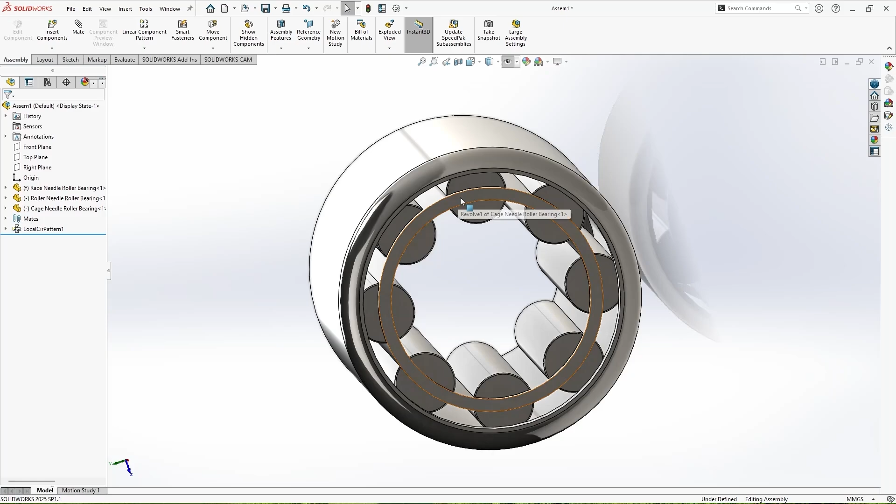Starting from the inner race, then the roller, the cage, and finally the full assembly.

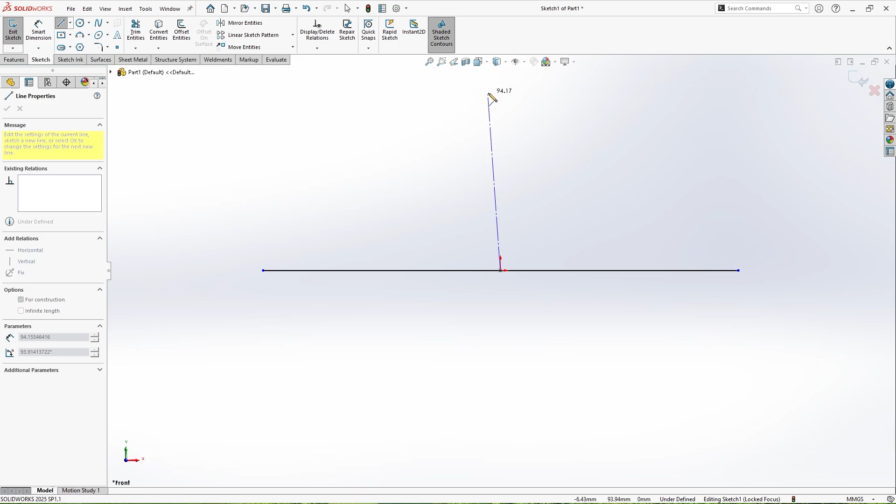To begin with, create a new part and open a sketch on the front plane. Next, draw a horizontal midpoint line, making sure it's centered at the origin. After that, add a vertical center line starting from the origin. This will act as the axis for the revolve feature later.

Now turn the horizontal line into construction geometry, so it doesn't interfere with the main shape. Then draw a rectangle; this will form the base profile of the inner race. Inside the rectangle, draw a vertical line and a small circle near the top. This helps define the internal shape.

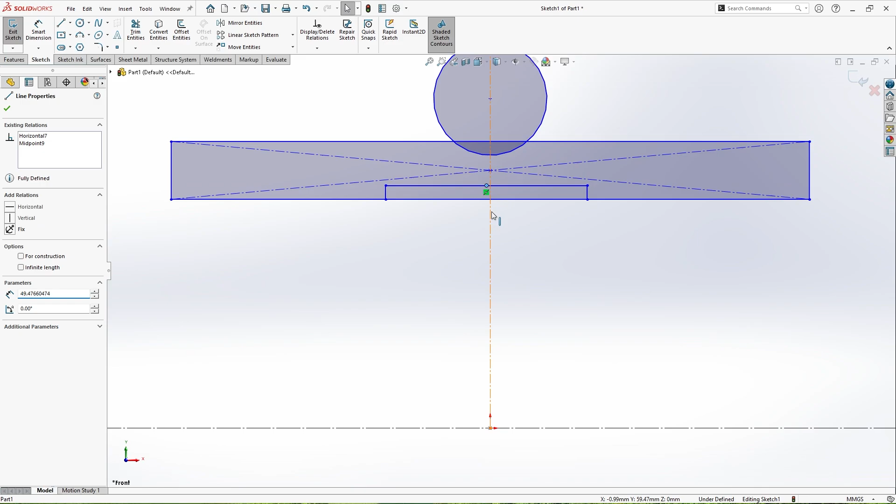Next, use trim entities to remove extra lines and clean up your sketch. Then apply Smart Dimension to lock the size and ensure everything is fully defined.

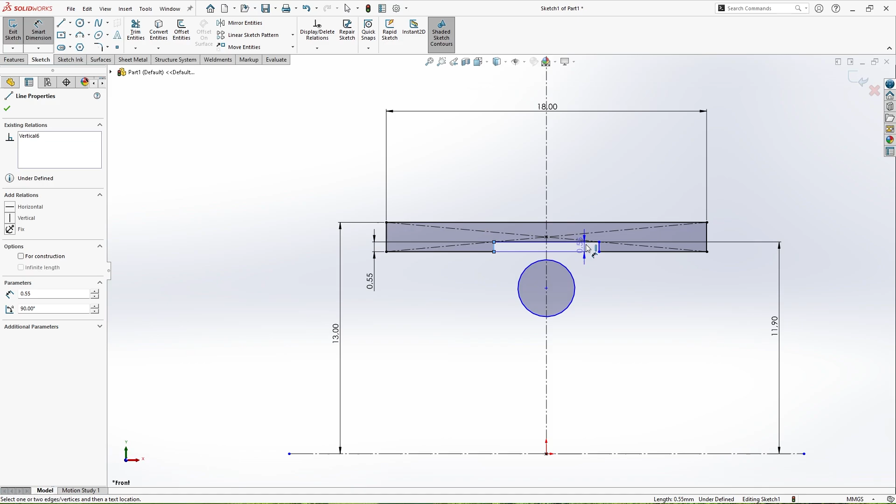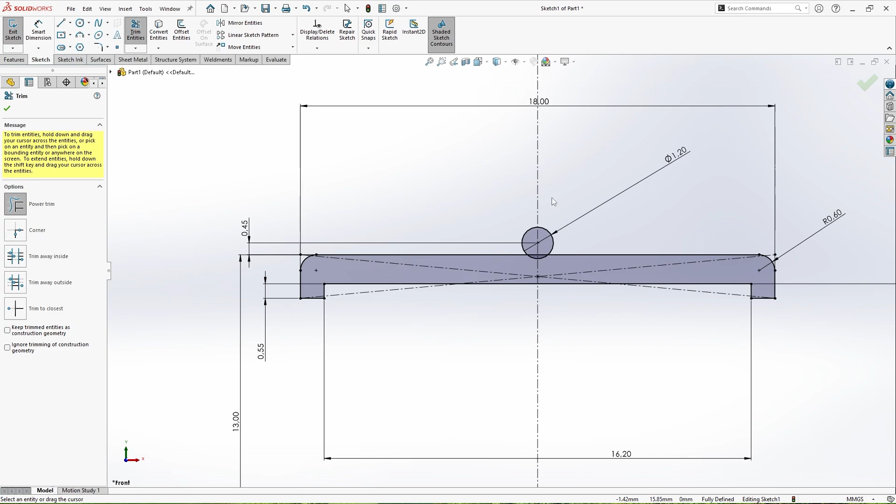After that, add a fillet to the top corners to smooth out the shape. Once that's done, trim any leftover edges you don't need.

Now revolve the profile using the revolved boss/base to turn it into 3D. Finally, save the part as the inner race needle roller.

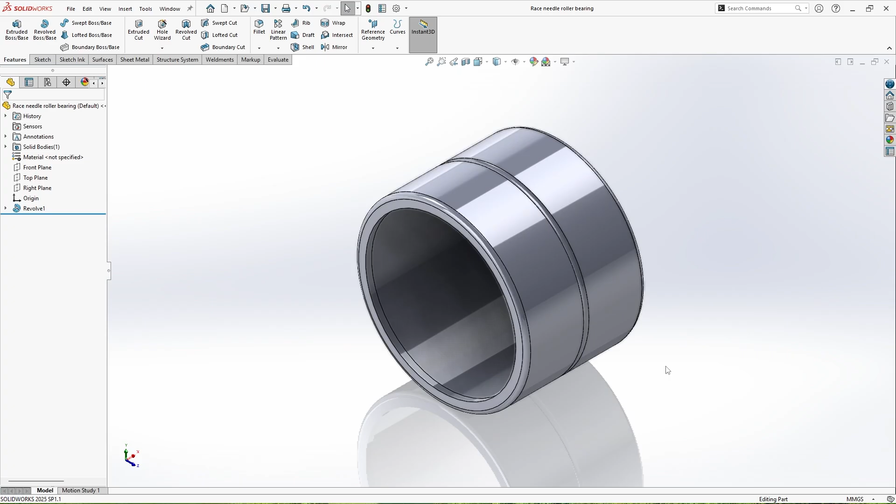Next, the roller. Create a new part and start a sketch on the front plane. Then draw a rectangle and make sure it's center aligned with the origin. This keeps the part balanced when it's revolved. After that, use Smart Dimension to set the height and the width.

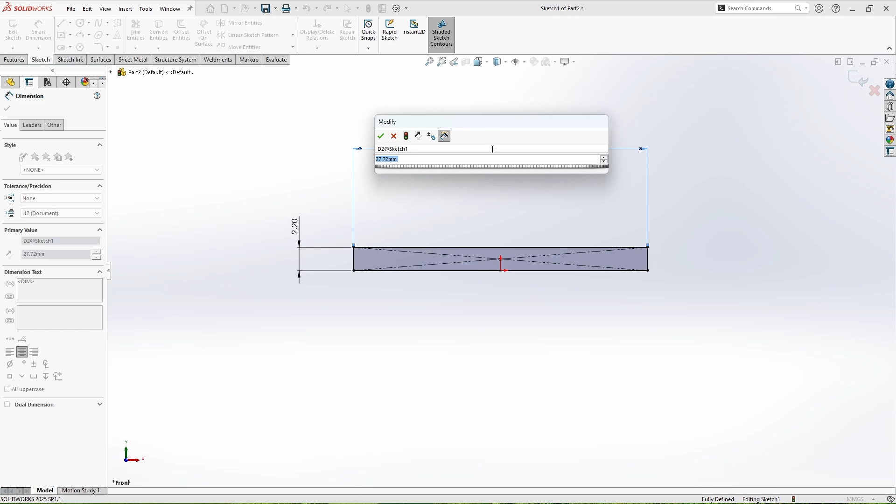Now add a fillet to the top two corners; this helps reduce friction in real-world use. Use the Revolve feature to create the 3D roller. Finally, save it as the roller needle roller bearing.

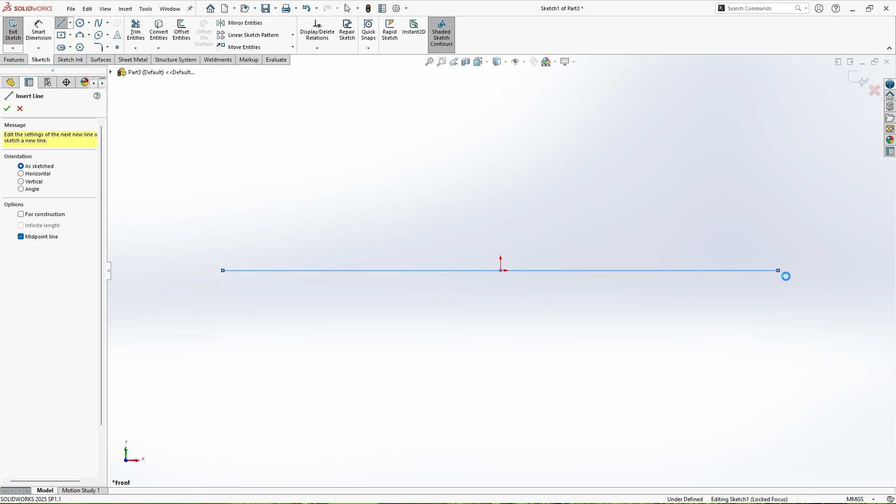Next is the cage. Now start a new part and open a sketch on the front plane. Begin by drawing a horizontal midpoint line and a vertical center line from the origin. Then turn the horizontal line into construction geometry.

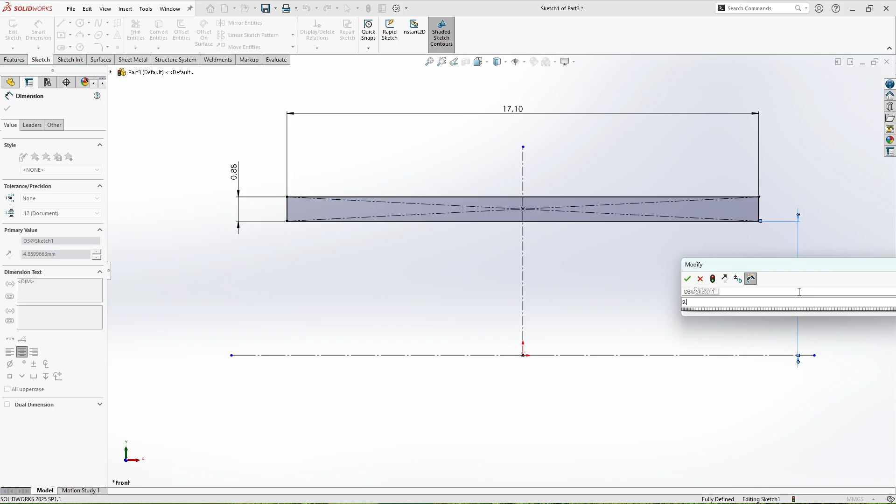After that, draw a rectangle to define the outer shape of the cage. Next, use Smart Dimension to size the sketch precisely. Now use the Revolve feature to give it thickness and make it 3D.

Then switch to the right plane and open a new sketch. Draw a circle centered at the origin and convert it into construction geometry.

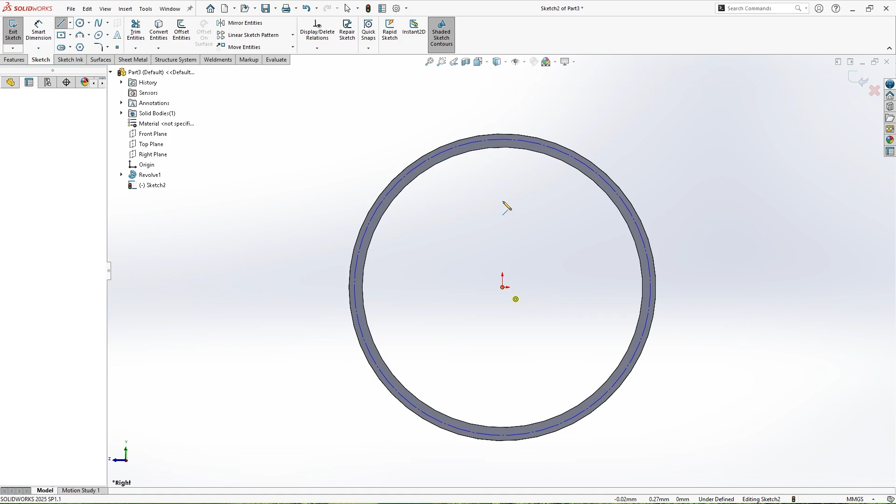Now draw 3 connected center lines from the origin to guide the hole placement. Then set 2 angled lines to have equal length using the equal relation. Next, draw a circle at the top end of the center line; this will be the hole cut.

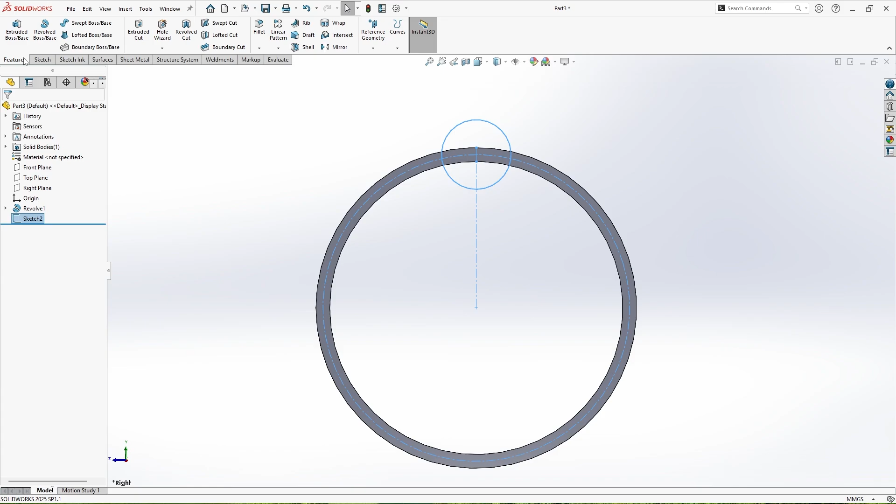Use Smart Dimension to set the diameter of the circle. After that, use Extrude Cut to remove the material and create the hole.

Click Show Item to reveal the center axis. Now use circular pattern to duplicate the hole around the cage, with a total of 10.

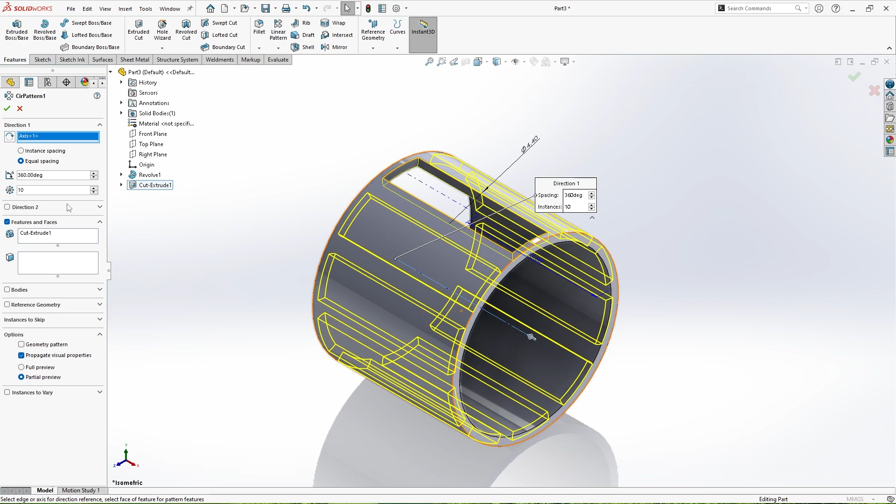Finally, save the part as the cage needle roller. Next, the assembly. Create a new assembly, then insert all 3 parts: the inner race, roller, and cage.

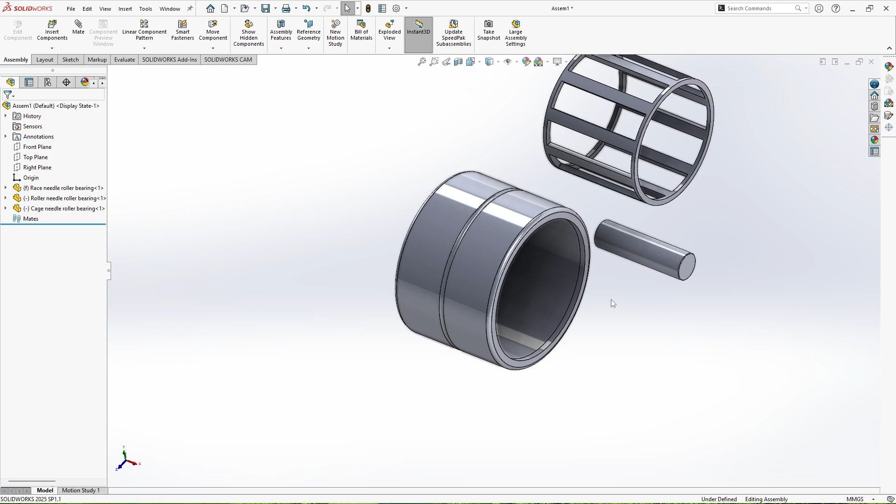Start by using Mate with the concentric option to align the cage and the inner race. Then use Mate to keep both parts centered face to face. Now use tangent mate to place the roller so it touches the race.

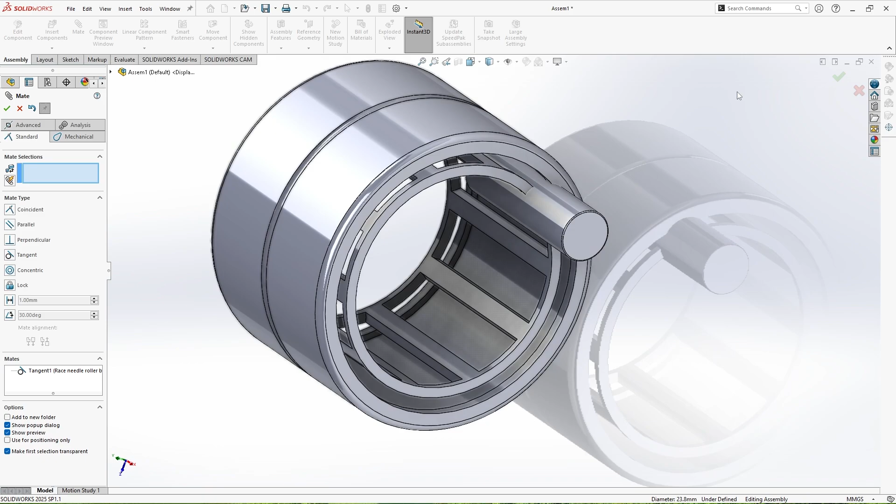Hide the inner race for now, so it's easier to place the rollers. Then use coincident mate between the front plane of the cage and the roller. Next, apply a width mate to center the roller inside the cage.

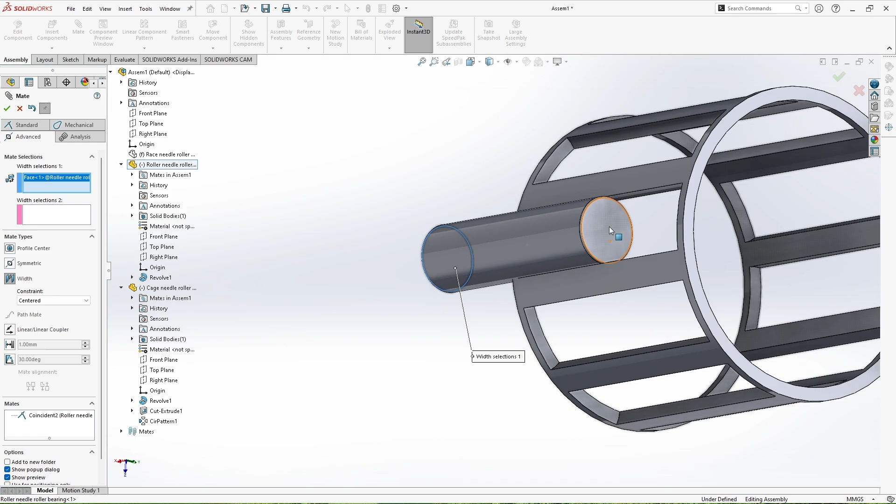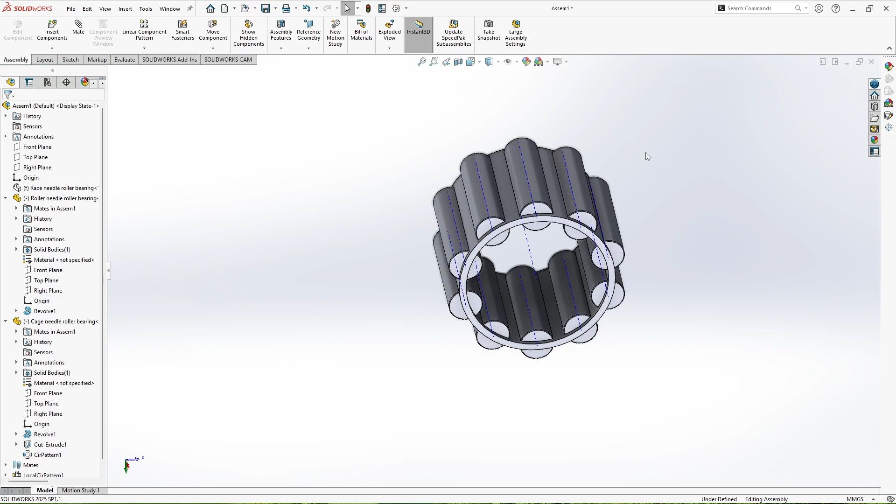Now show the axis 1 of the cage. Use circular pattern to duplicate the roller around the cage using axis 1, with 10 total. Unhide the inner race to complete the layout.

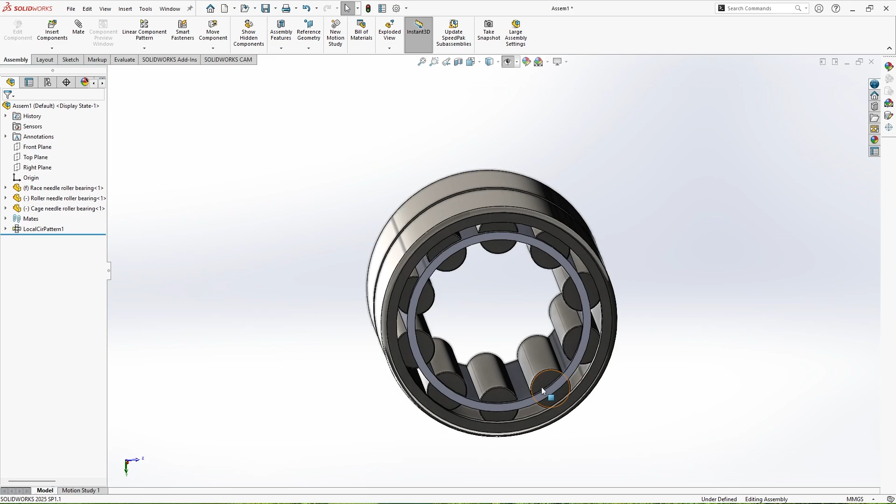And lastly, apply the material to each part. And that's it, the needle roller bearing is complete.